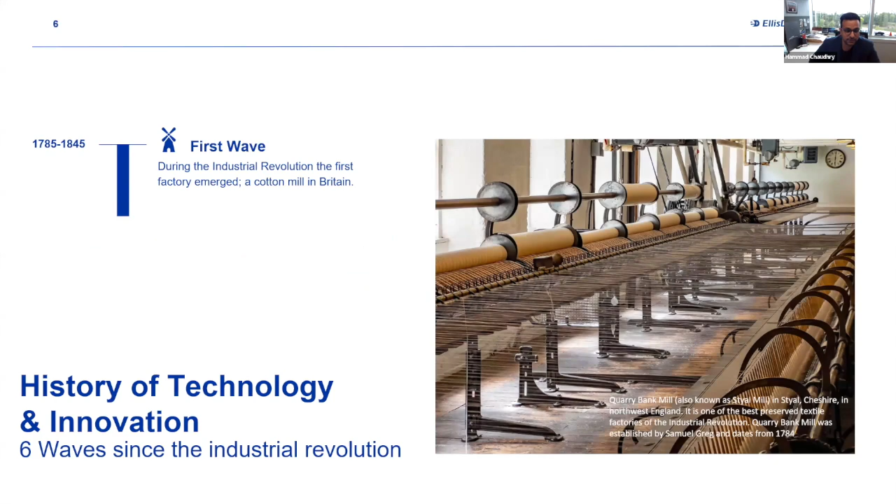We need to understand what happened that led us to this point with construction technology. And we're going to have to go back in time about 250 years or so, the first wave in the Industrial Revolution, when the cotton mill in Britain came up. That led to what you could argue is one of the first of the six waves.

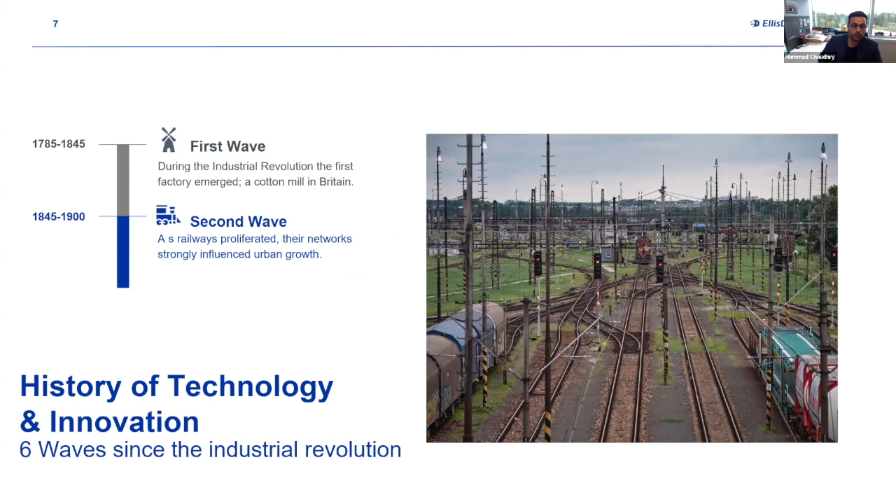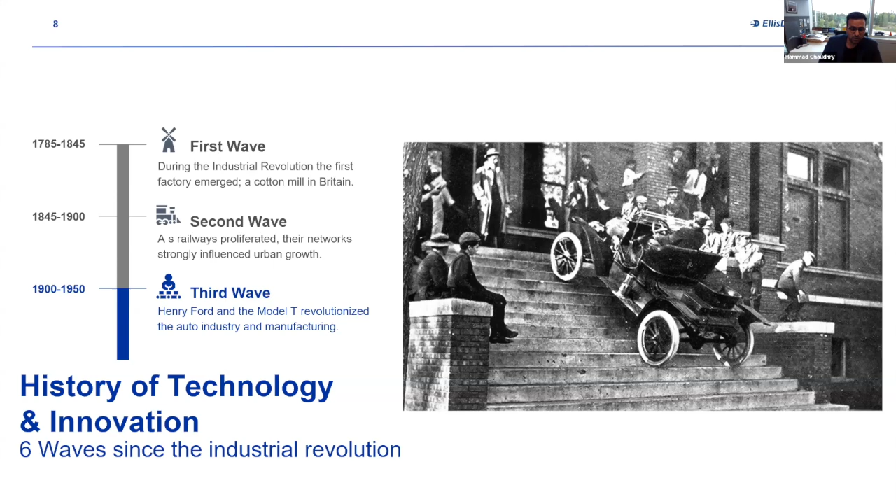The second one was when railways came in and proliferated urban growth across society. And then, of course, that was followed by Henry Ford, the Model T, and the revolution in manufacturing. It's really important because this unlocked productivity within society that we had not seen before.

And as time moved forward, we witnessed the aviation industry take off. This allowed for people, ideas, and obviously economic integration across the world, really speeding up economic development in a lot of economies.

And then the one that we've all kind of lived through over the past 20, 30 years, the digital era, this has really flipped things on its head for industries like news, media, even finance. There's altogether new segments of the economy that never existed with these digital companies that now represent huge opportunity and growth.

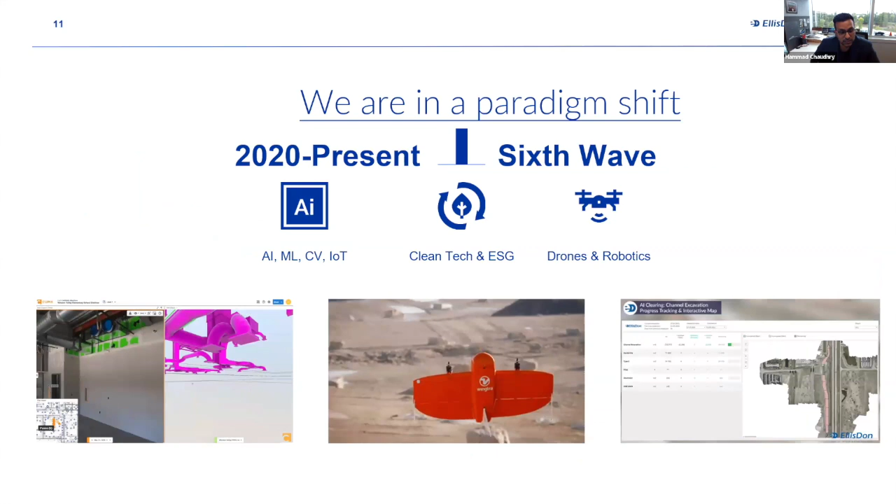And we're actually living through a paradigm shift in the latest one. You could argue the sixth wave is among us now, with artificial intelligence, machine learning, computer vision, connected devices, IoT, of course the clean tech revolution, robotics and drones. All of these things now are posing a new wave of innovation that could unlock economic growth in a way that we've seen with the past waves.

And if we focus a little bit closer to construction and look at some of the trends there, each decade over the past several decades has had some really key innovations. So in the 60s, hydraulic equipment was one of the biggest things that kind of helped the segment kind of stay innovative and grow. By the 70s, it was our material advancements and petrochemicals, silicon, flex duct, conduits, all those kind of things that we rely so heavily on today.

In the 80s is when AutoCAD and the personal computer and the PC started to really take place. And we'll talk a little bit about that in a bit as well. In the 90s is about technology coming in place. We saw robotic total stations, the predecessor to Revit, and all those kind of tech companies start to take place.

But in the 2000s is where we saw a lot of digital innovation. So Lightwork Design, which got acquired by Autodesk as Navisworks, same thing with Revit, Procore, Aconex. All these tools were coming into the market and growing as startups, and obviously being acquired by some of the larger companies like Autodesk. And then in the 2010s, that's when software really started to blow up.

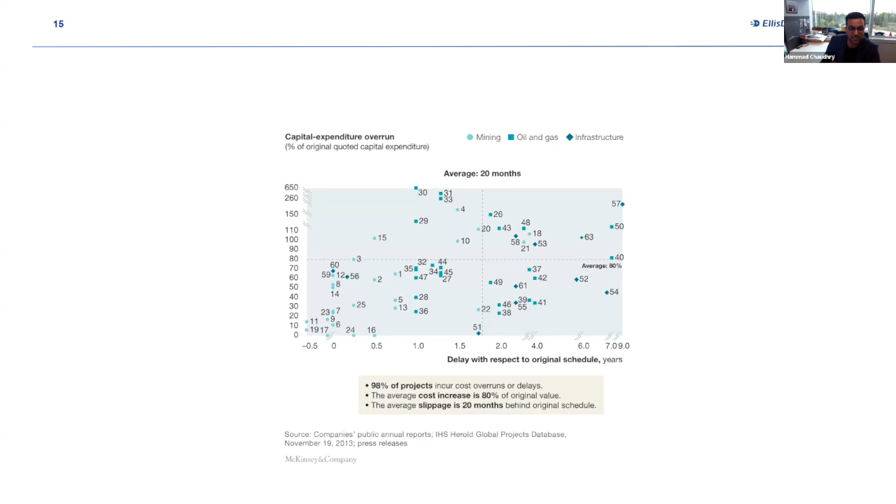And this is also before COVID, but since COVID, everybody has a pretty good awareness of the supply chain crunch we've been facing. Another key thing you'll notice, even though construction is one of the largest pieces of the global economy, the digital maturity when it comes to other pieces of the economy puts construction as kind of a laggard.

But it's not because people aren't trying or there's not new technology. It's actually pretty complicated, and we'll try and peel some of those back at a high level. So the first thing about industry challenges, there's hundreds of factors driving change, but the three main conversation pieces you'll hear frequently are: projects are becoming more complex, we have less skilled labor to hire and bring in, and schedules are being compressed.

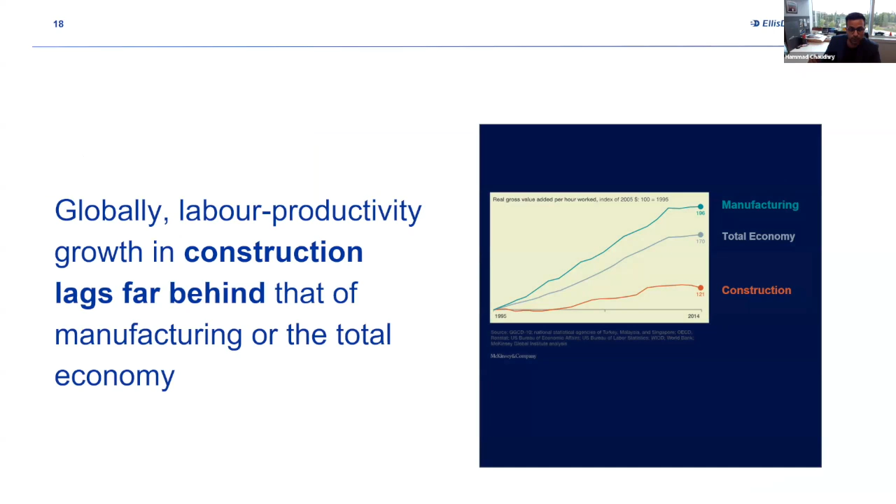So on top of the supply chain issues, we need to get things built quicker and faster. But one issue we face overall in the construction industry at large is that we don't see the same kind of returns when it comes to productivity that you would get in the overall economy or in manufacturing.

And manufacturing is a really interesting place for us to look, comparing it to construction. They have full 3D-based processes designed for manufacturing and assembly. This lets them look at projects that are far more complex, get a lot more design up front. So you could argue they're better designed, and therefore you can spend more time on the quality, get things out to the market quicker, and create a more economic product.

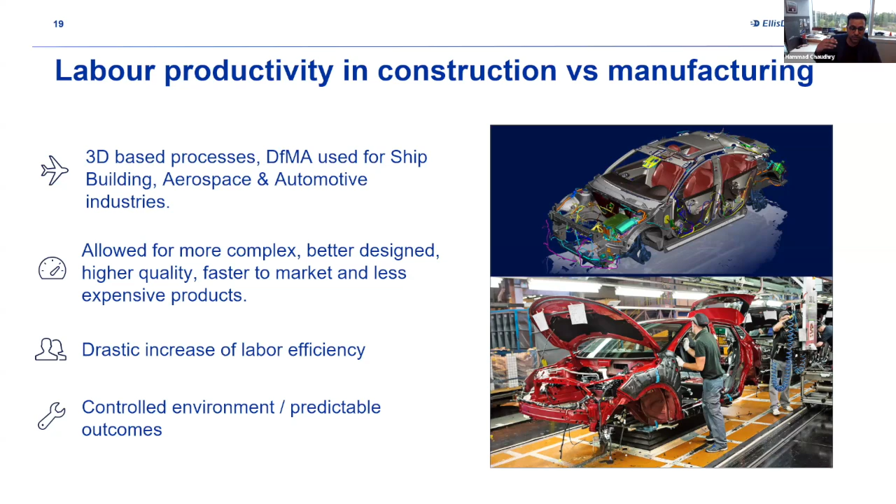And because of that, you also see that the manufacturing industry has a labor efficiency that's significantly higher. Every worker you add in manufacturing, you're going to see a lot higher output of whatever your business is doing compared to construction in general. And the other thing about manufacturing is it gives you a controlled environment so you can really repeat and build on predictable outcomes.

Precision is other places as well. Carl Zeiss makes some of the best lenses for cameras and equipment that you can get in the world. Bosch makes some of the best equipment, including dishwashers, as funny as that may sound. And then Lamy makes some of the best pens and pencils in the world. And this is Germany, just a few examples. There's a ton of other examples of their high quality precision manufacturing at scale.

And if you think about technology, a lot of people will think about Apple. They make phones, iPads, laptops, thousands of those. So you would think they'd be able to bring that same manufacturing prowess into construction. And for their headquarters, over $2 billion over budget, and a couple of years over schedule as well.

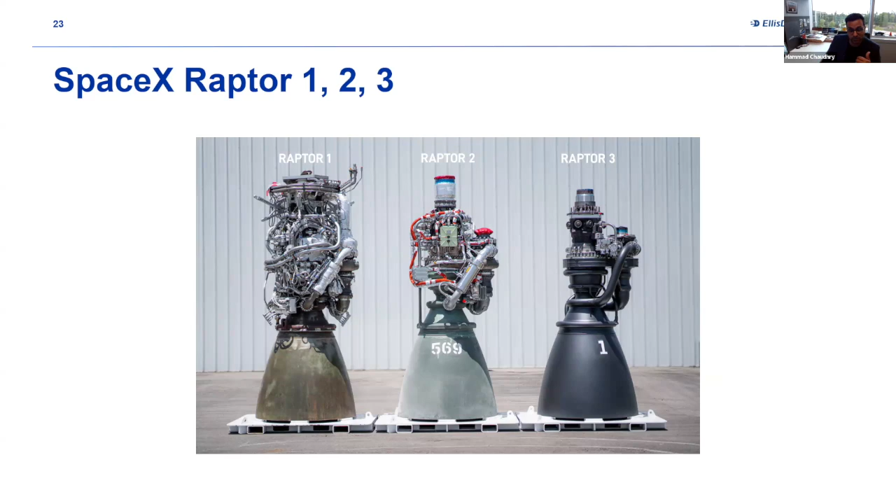Looking at another example for manufacturing that shows how much they can innovate in such a short period of time is SpaceX. In 2008, the Raptor 1 engine was a concept, an ideation. In 2024, the third generation Raptor 3 is here. In that short period of time, they've not only produced a lot of these engines, they've been able to iterate on generations and create improvements that are remarkable.

But we don't have that luxury. Every single building is a prototype. We do have different contract types to try and help move the risk, try and get people aligned. We also have different project types. So every time you have a new team, a new client, a new group of subcontractors and trade partners and design partners, and the people behind them and the supply chain. And so you don't get that ability that you do in manufacturing.

Another thing about the barriers you see in construction is we need to upskill people. We need to provide education, and it's expensive. Who's going to be providing that? A lot of the firms you look at, there's over 800,000 firms across North America that are within construction, focused business as a subcontractor, general contractor, or whatnot. It's hard for them to have leadership and buy-in when you're project to project reliant. Not all of them have that ability.

And then you throw in the regulatory and authorities having jurisdiction, compliance issues. A lot of times there's a big risk. I know this pen and paper or old school methodology meets all the criteria in case something happens, but the new technology may not be proven and there's no methods to bring that in either. And of course, you have traditional culture and resistance to change, preference for those manual processes, as I just talked about. The fragmentation in our industry compared to others is significantly higher.

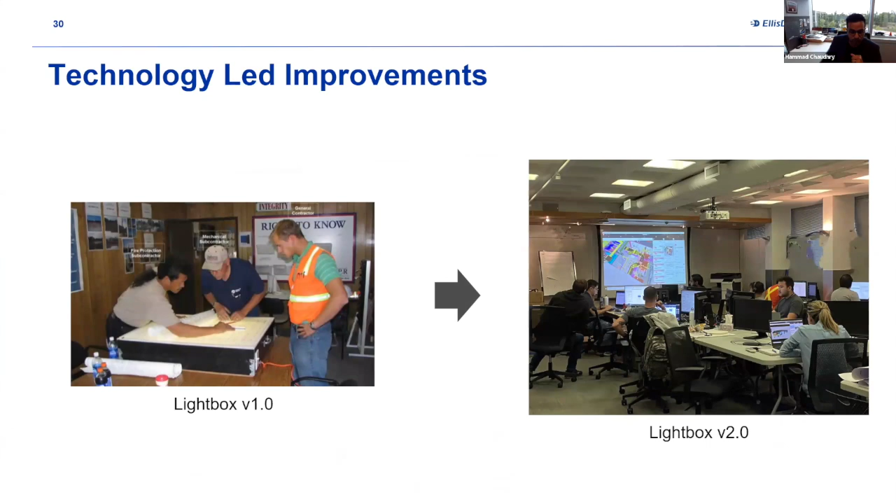Another cool and simple example is looking at markups. Markups are also something that rely on the drawings in the field. Sometimes you can lose them and it's hard to keep. But with the digital tools, whether you're on your phone or on the desktop, it's easy to do them. We can keep record and you don't need to worry about losing access.

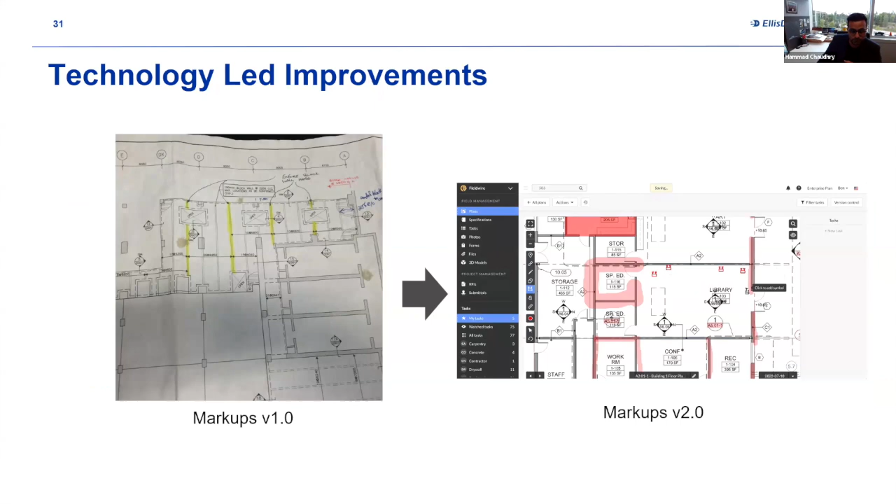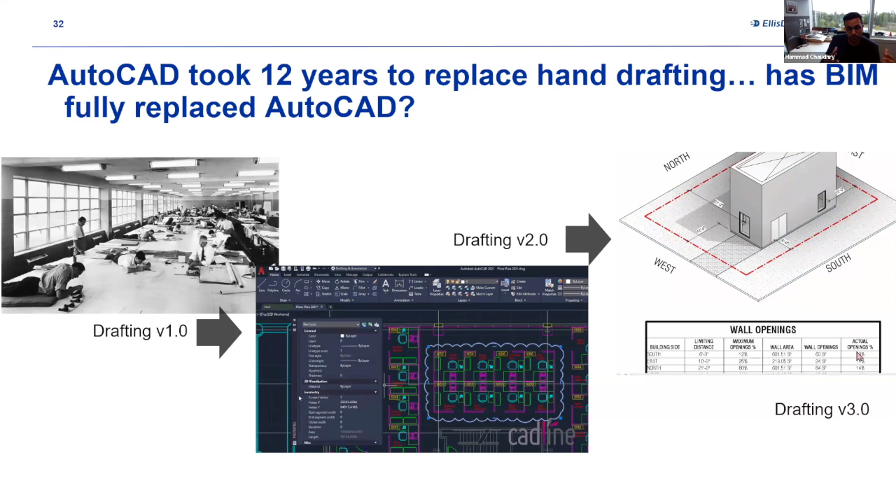As we were adopting AutoCAD over 12 years, BIM started to come up, and now we've made that shift to BIM primarily. But we also have not shifted the business models. When I was coming into the construction industry, some of the folks I learned from used to talk a lot about the master builder concept, and how that has now completely shifted away. If you compare CAD and BIM to drafting, there's been a shift away from how we're doing production, and the thought that used to go into it has become a lot different.

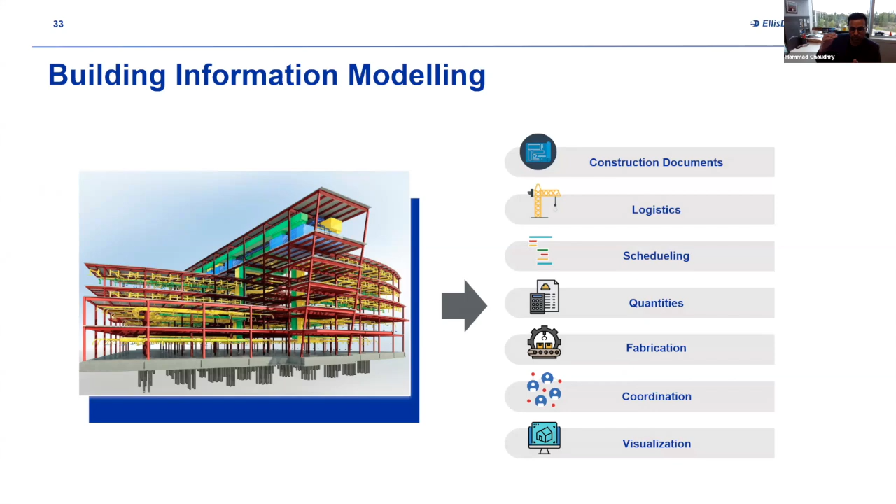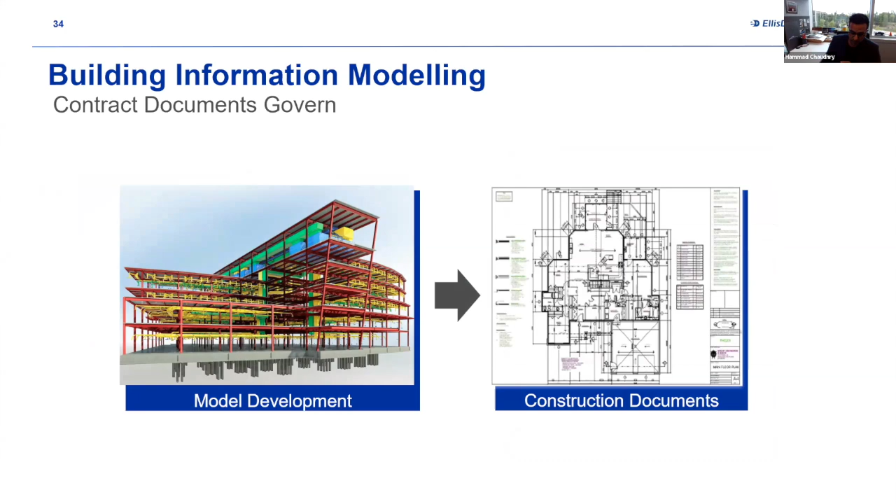There is a need for us to compete on the global stage and look at what's happening. If we look at Europe, the government has stepped in and brought in some digital mandates. The UK is even exporting some of their frameworks through ISO 19650. In the Middle East, the UAE is mandating digital building permits through the use of BIM. The US is a completely different market. They don't have any federal mandates, but they've been pioneers in not just developing startups, but also a lot of the construction technology you see around the world, and they're starting to have that conversation about bringing in certain government requirements.

In Canada now, all of the large players use technology like BIM, but there's still a huge gap for us. We're actually not maybe at the level we could be competing at when you look at the US and Europe with these tools and technologies.

As all of that's happening really quickly, we'll wrap up with venture capital. Normally venture capital, you think about startups like Uber and Airbnb and whatnot. Now a lot of these folks are looking at construction technology because of what we've just talked about. They like disruptive technology, they see a gap with how many people are coming in, so labor shortage, more spending on infrastructure construction. They know the benefits and they're looking for returns.

So really, how is the industry responding? What have they done? If you look at EllisDon, we've developed a lot of stuff in-house now, a lot of effort from our data infrastructure, BIM, VDC, software development. We've also launched our construction technology ecosystem, so we have a great set of pilot program startups that we work with. We also have an accelerator where we do a call to action, and we've received 250 plus applications over the past two years. And then we're looking to build out this ecosystem with partnerships.

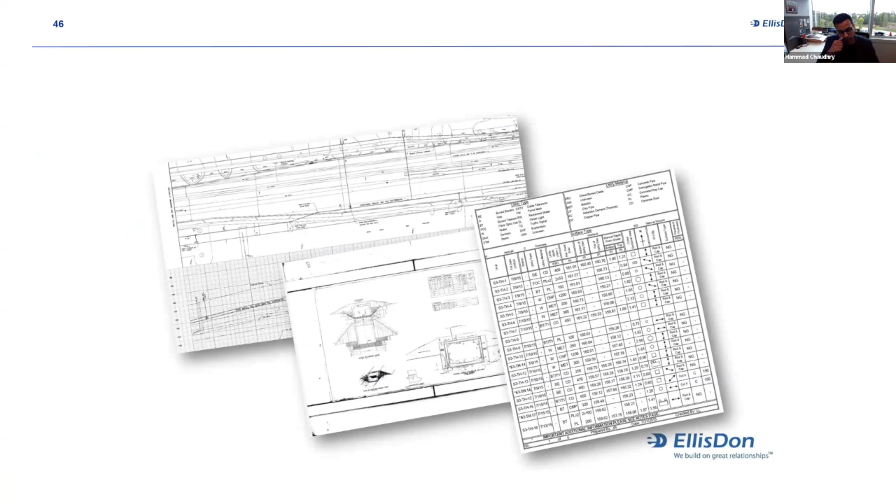Or you're looking at documents, drawings, and interpreting what they say, the risk that lies within them. That is really, really where the biggest benefit is, through visual communication, getting everyone on the same page.

A great example of that is a phenomenon happening right now: the convergence of reality capture. Before, your normal time-lapse camera, your drone, your laser scanner, 360 photo, they wouldn't really be overlapping. They're kind of separate technologies and tools.

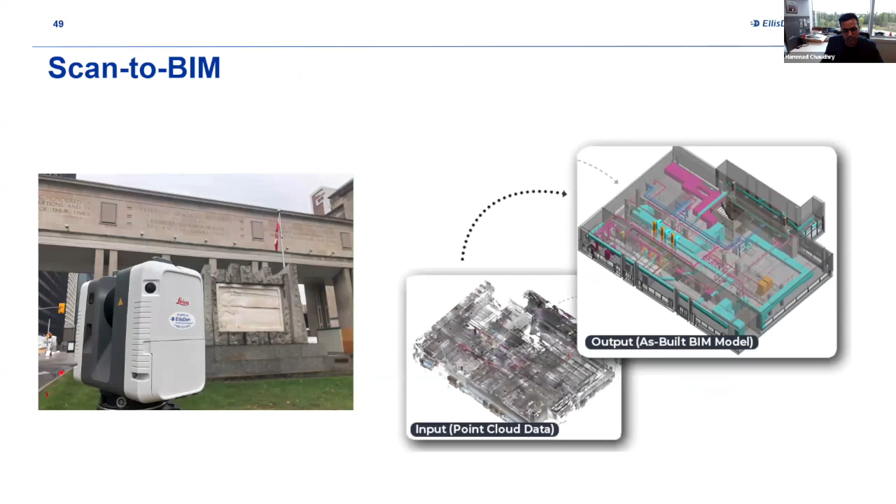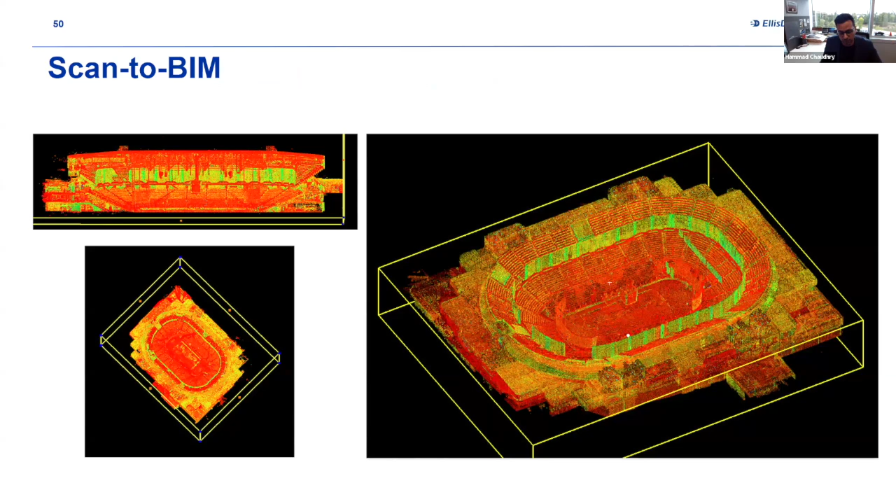But now the way the industry is moving with laser scanning and that whole scan-to-BIM process, we're seeing a convergence. On your screen, this is an example of a project, a stadium, which has been fully scanned at roughly 2 to 5 millimeter accuracy, tied in and georeferenced on this massive project, which then produces on our end this 3D model that the team can use to do a renovation or an upgrade.

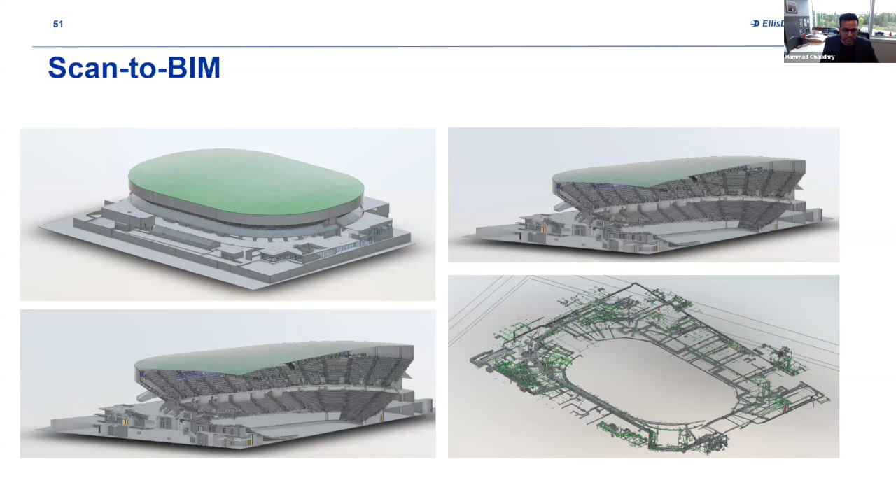At the same time, doing 360 photos allows you to capture any state of time in the project. You're walking around with this simple camera all around you, as opposed to taking 20 photos, and it's now become very inexpensive and affordable. You can throw in your model and do comparisons.

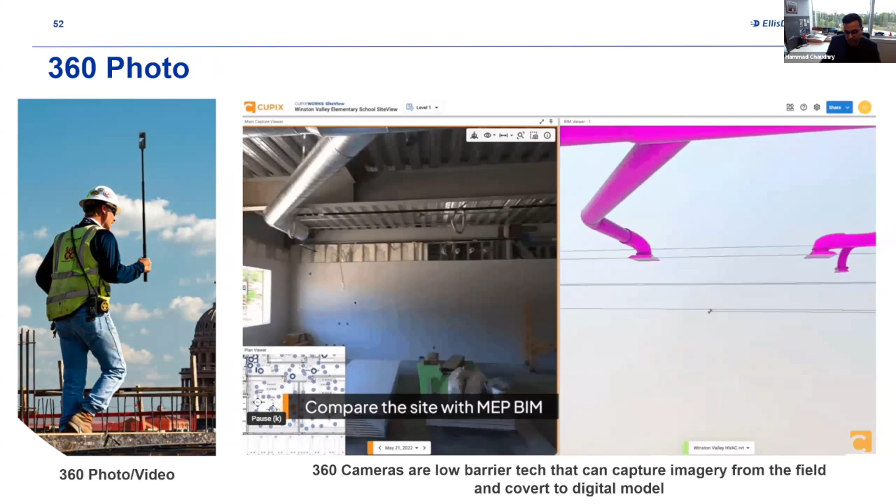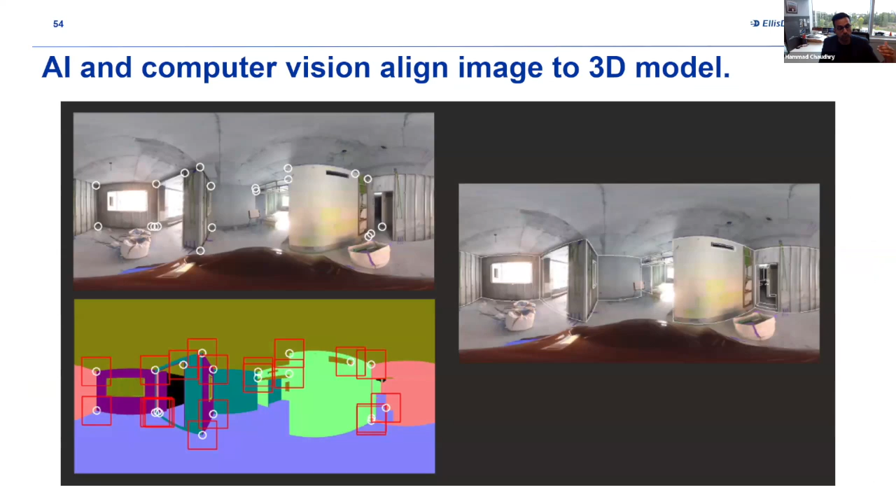And now with artificial intelligence, tools like BuildDots are letting us not only do the capture and overlay the model, bring in our schedule and as-built information, but let the AI do a comparison through computer vision, aligning that photo with the model and comparing the two pieces so you can see where reality has certain scopes of work, installation progress, compared to what was planned based on the model. It's quite remarkable that you can see things like this example here.

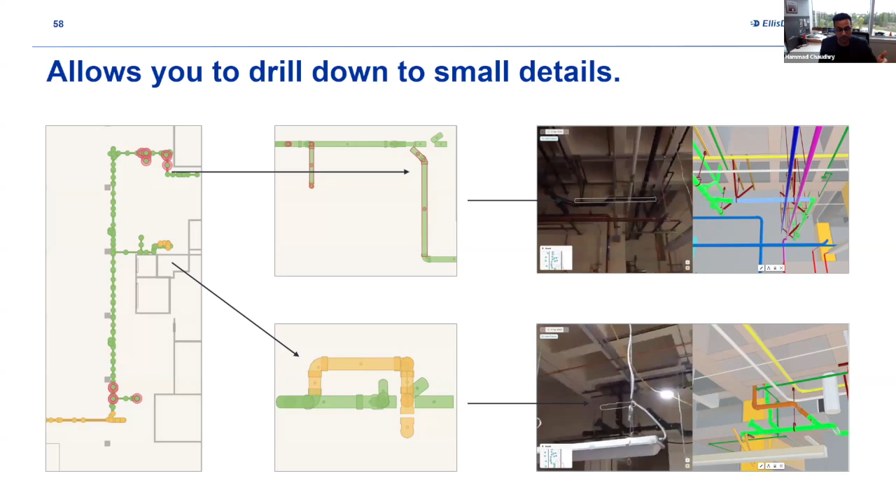You see the missing pipe on the top right, and it takes a jog instead of being a full straight run. There's also some missing segments or in-progress installation, and the algorithm, the computer vision, the dashboard, everything can now tell you, hey, are things on schedule or are they behind schedule?

This is remarkable when you think about it, because before maybe we'd have to go scan, get drawings from your sub-trades and superintendents, look at the photos, and create a report. Now you're getting a dashboard that tells you what's complete, what's on schedule, even predicting how many days it's going to take to complete that job.

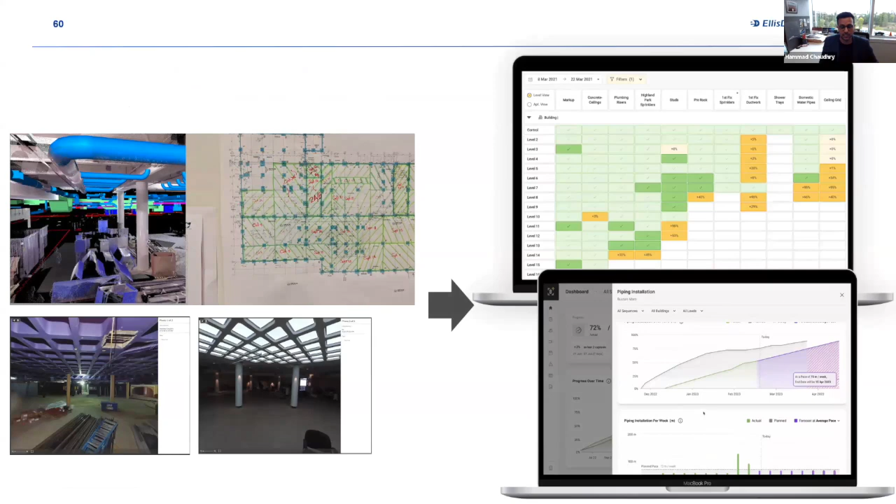And that's not it. If you think about facility management, when you hand over a project, typically you'd be providing loads and loads of binders and drawings. You'd come back and find a room with a chaotic set of drawings, maybe a lot of markups. Now with tools like Cupix, we can take photos, add annotations, comments, add our model, and hand that over instead.

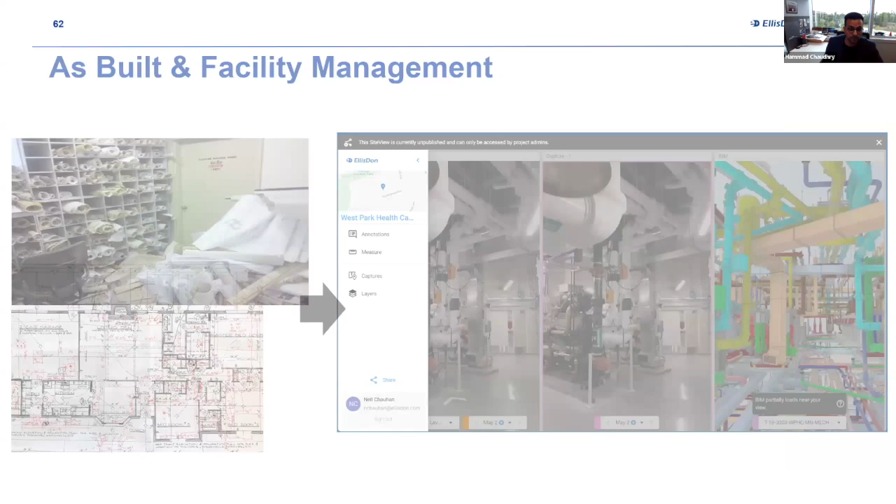Another big use is drones. When you look at the photos we can take with drones, they're getting higher and higher quality with more and more survey grade information.

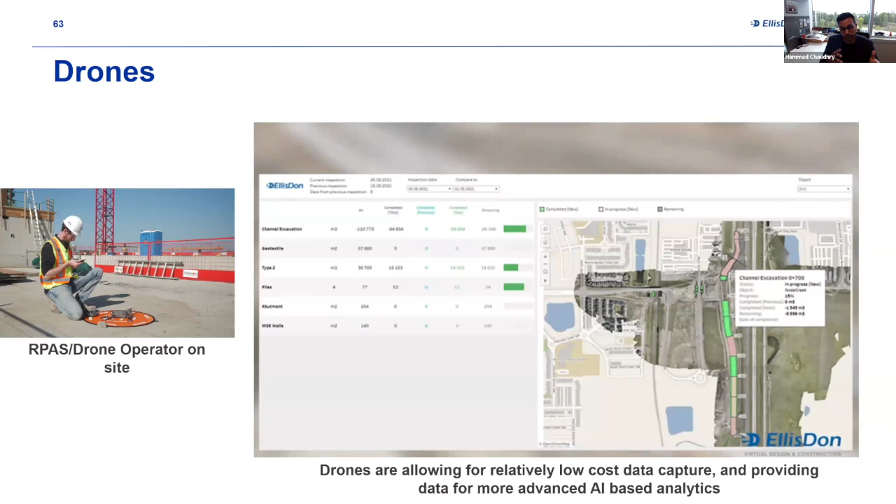Inputting that with GIS technology, this example is with AI clearing. You can now see if things are installed per schedule, how much quantity was installed, and whether it's within the right area in terms of installation tolerances.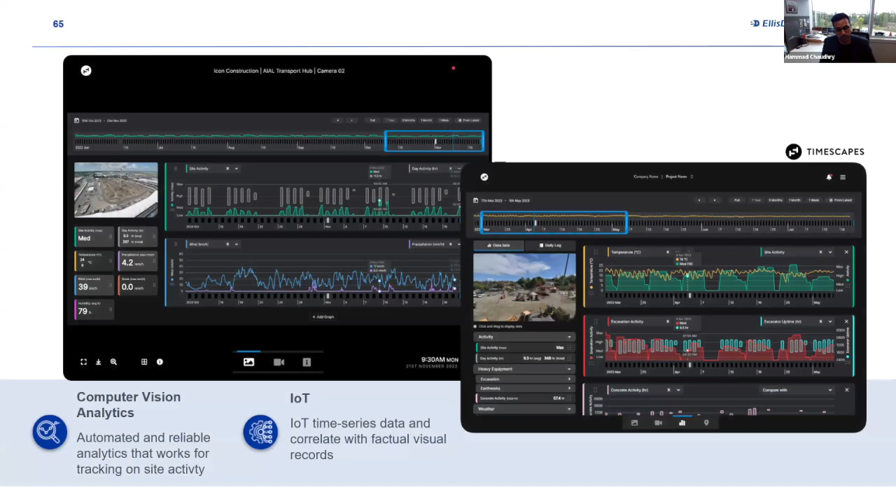Quickly, we'll talk about fixed position cameras as well. So what was just a still picture is now a bunch of analytics thanks to computer vision. You can see historical weather, activity on site, and start to look at computer vision as tagging a lot of these elements.

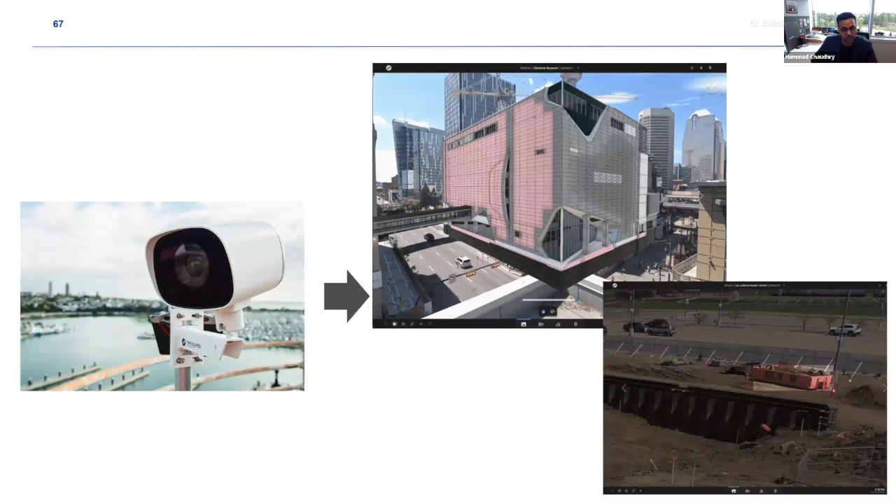As you get more and more photos and more models, you can pull out infinitely more information. An example is if you look at that model, we're just overlaying it so you can see what's happening. The level of analytics we can pull, on the bottom right, is whenever a dumpster is full on site, now you can get an alert: dumpster full, let's get that empty.

I want to switch gears quickly as we wrap up to think about the disconnect between what's happening on site and what we think. You have labor shortages, compressed schedules, all this kind of stuff, and we're trying to maintain a workflow.

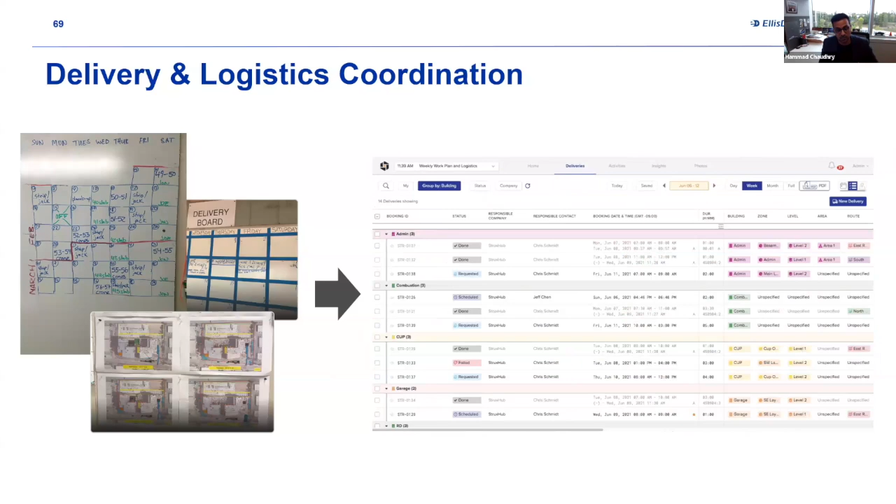So it's not just about AI and cutting-edge tools. A lot of it is about digitizing the process that exists in a way that makes sense, based on the technology available today, like Jeff's quote was saying. So delivery and logistics can become platforms you access on a mobile device and digitize entirely instead of using whiteboards. Same thing when you look at scheduling and planning.

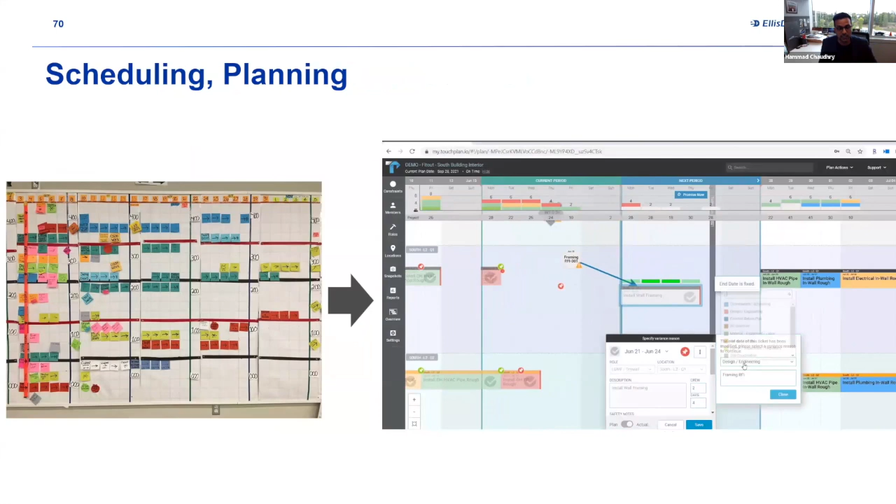You can take that off the whiteboard and bring it into a digital environment to do a lot more digital collaboration, involve more people, and keep that historically. You can get people into virtual environments to do design reviews and mock-ups. Our team across Canada has been doing a lot of this work and it's making an impact.

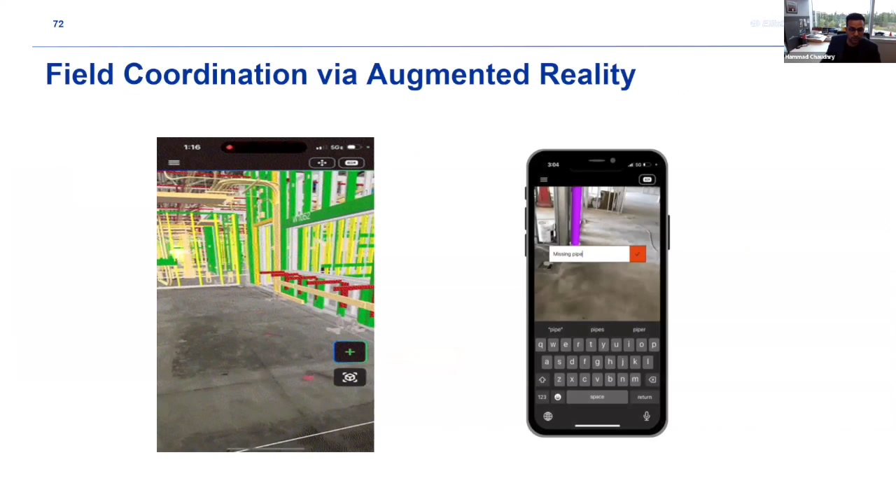But getting technology to the field is really important, and we haven't seen that amount of technology coming in until recently. SiteLink can bring your model in and let you really look at what you're trying to install and coordinate. Things like Crew Scope allow our teams to bring in incentivization to help the actual production, tying the hammers and nails, the people that are building, back to the bigger plan.

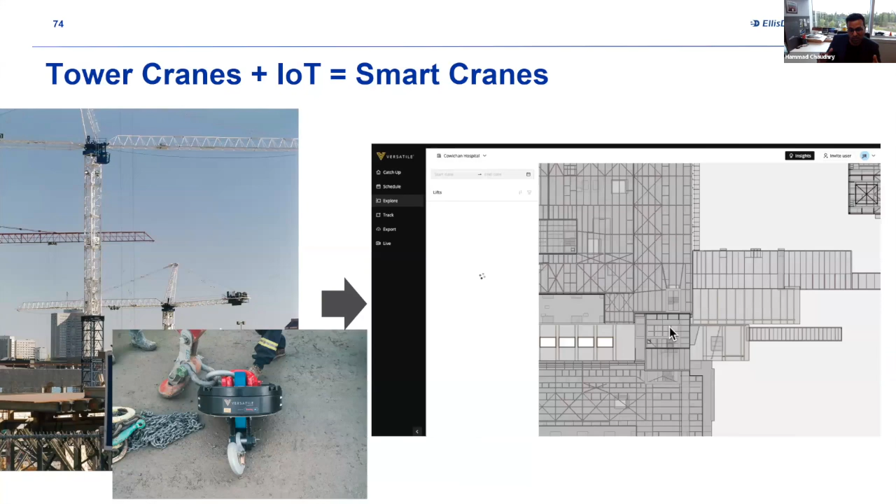Even things people don't think about as too advanced, like tower cranes, are now filled with devices from Versatile with IoT sensors and whatnot. So you can see how you're using your crane compared to your scheduled activity, and get a fully detailed understanding of historical activity as well, so you can build up your knowledge of how long it takes to, for example, set up formwork and do a pour on columns in a typical project sequence.

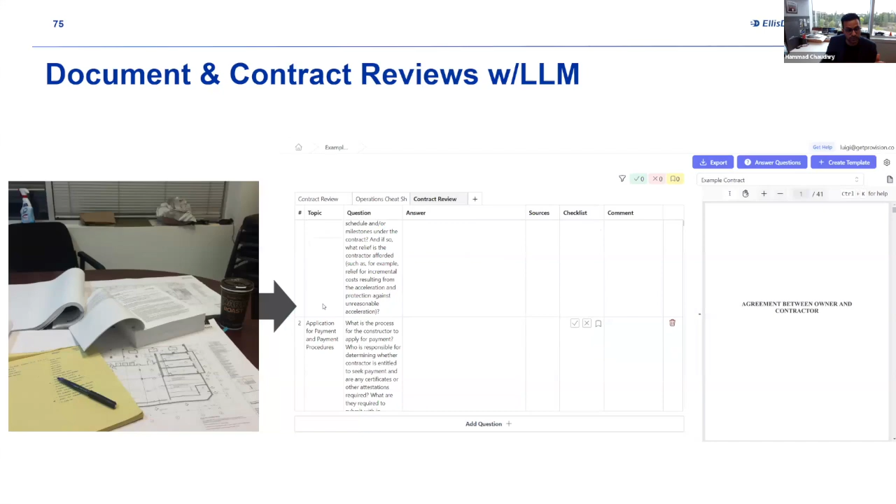Really, a lot of the key comes down to document and contract reviews, though. That's still the bread and butter of what we do. Even though it's a relationship-based business, we do need to know our risk. Tools like Provision, which use large language models to go through and comb these things and answer questions or checklists that you may typically look through, are another powerful example of that technology available today.

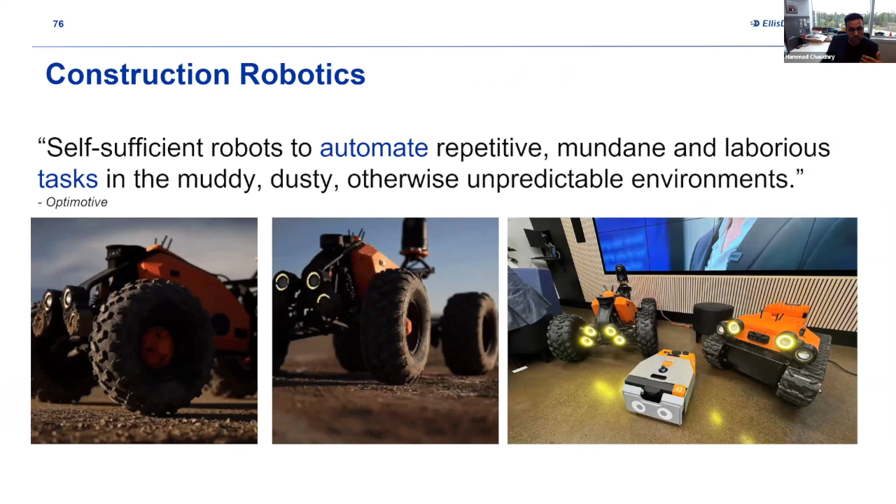To wrap it up, we're going to talk about construction robotics. It's probably one of the most interesting pieces of the industry that a lot of people are interested in because they like seeing robots moving on site. We are seeing progress, but there's so much more opportunity here.

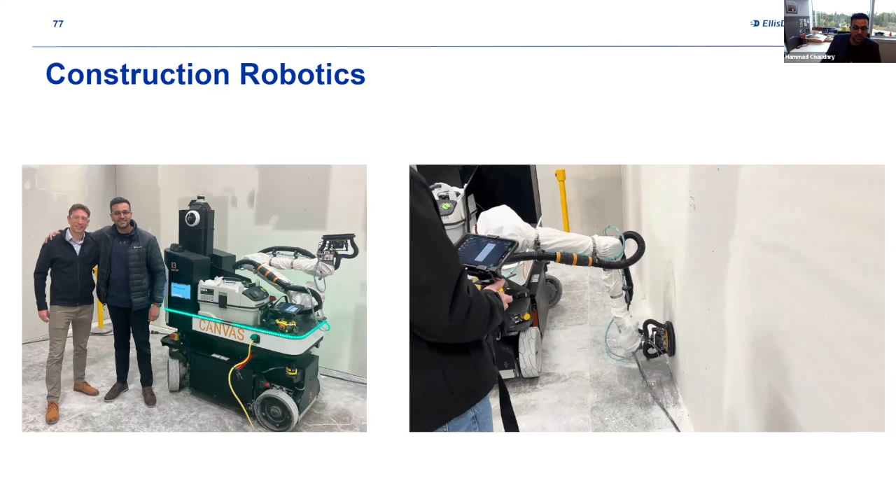This is an example from Canvas Robotics - a drywall robot that can paint, tape, sand, and get a super high level of finish. We are seeing a lot of this cutting-edge technology making its way in, but we still have a lot of progress to see going forward.